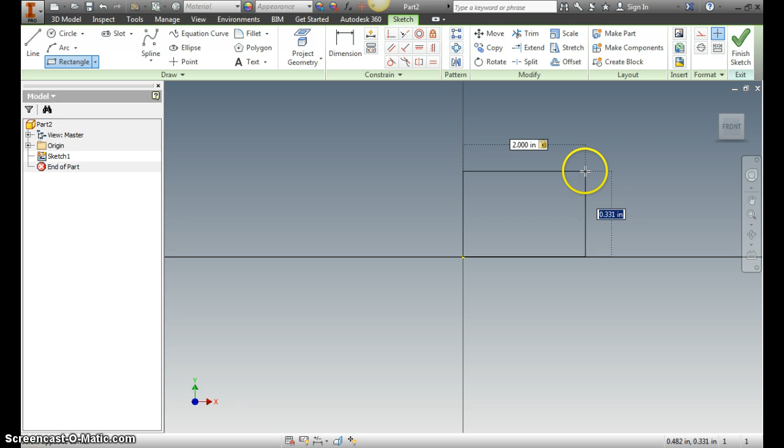So again, rectangle. That's going to be 2 by 5.5, and I think I'll also show you guys a few shortcuts or talk you through them. If I hit E on the keyboard, that's an extrude. 0.875 is the base.

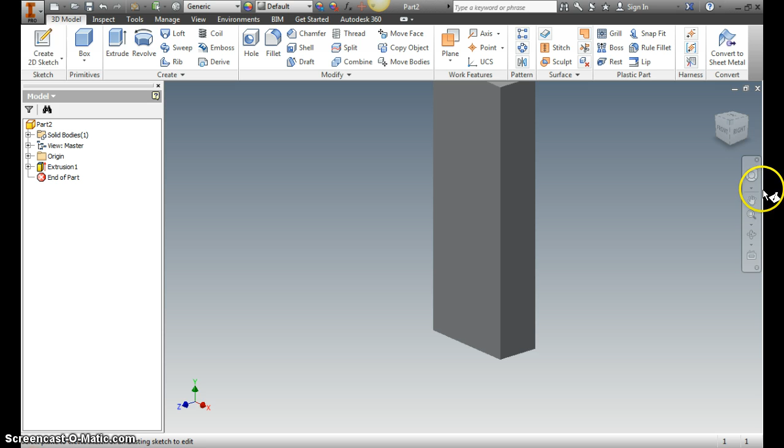Next up, I'm going to extrude the circle from the front towards the back. With that circle, what we know about it is the center is left and right, it's centered, but up and down it's 1.375 from the bottom of the train. Then we also know the radius is 0.75 inches. So in Autodesk, keep in mind, Autodesk uses diameters for circles.

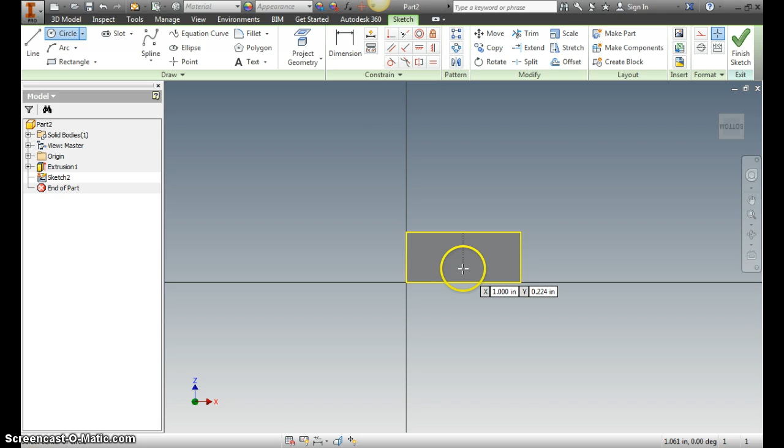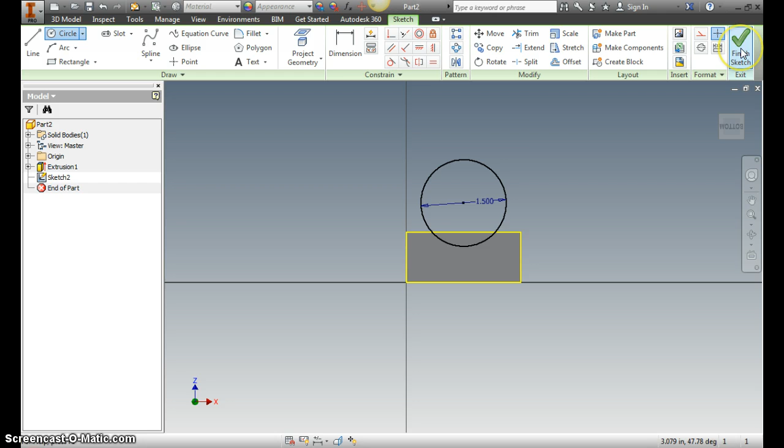So I'm going to start my circle, and what I can do is put that right where that dotted line starts showing me the center, and then I know 1.375 is my y-axis. That just gives me the center of my circle. From there I need to type in the 1.5 diameter. We'll finish the sketch and extrude our circle.

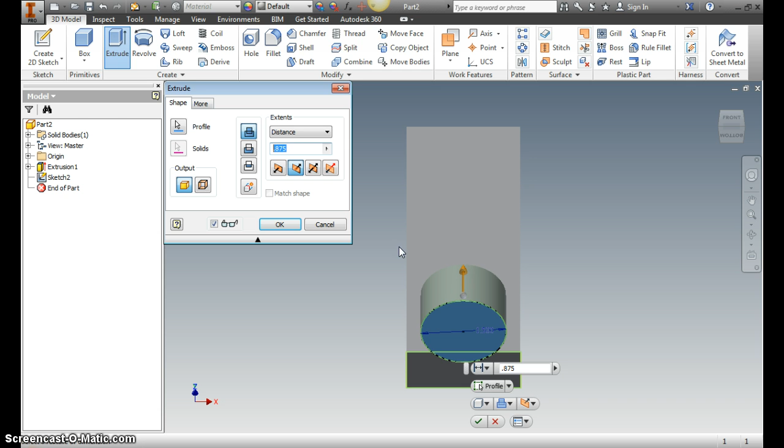Now we need to change direction, but we also need to keep in mind that when we change direction, it also switched it to remove material. So we need to go back to add material in that direction. And the distance, we don't know the distance, but we know that the whole train is 5.5 inches. So I'll type in 5.5, and then we want to subtract off the distance of the cab, which we know is 1.75. And there we've got the rest of the front of the train.

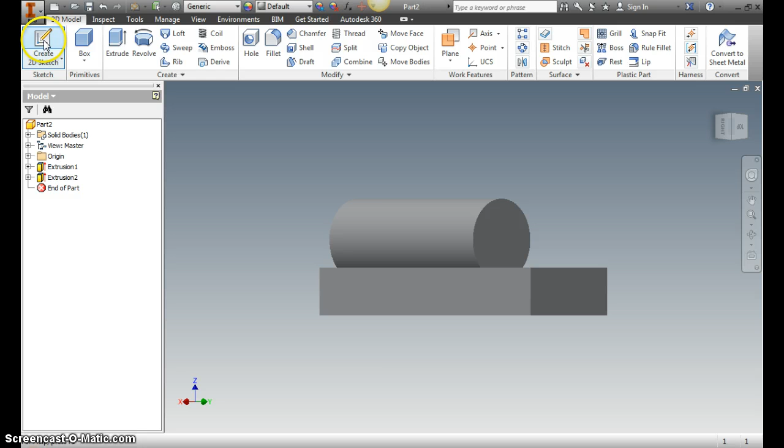Next we'll go to the back of the train and sketch on that back rectangle. We'll spin it around so that I can see what we're doing. Now, the cab of this thing is actually going to be better seen in this view here. If you look, you can see the left and right sides are vertical edges up from the base of the rectangle. The top of the cab, though, is part of an arc, basically.

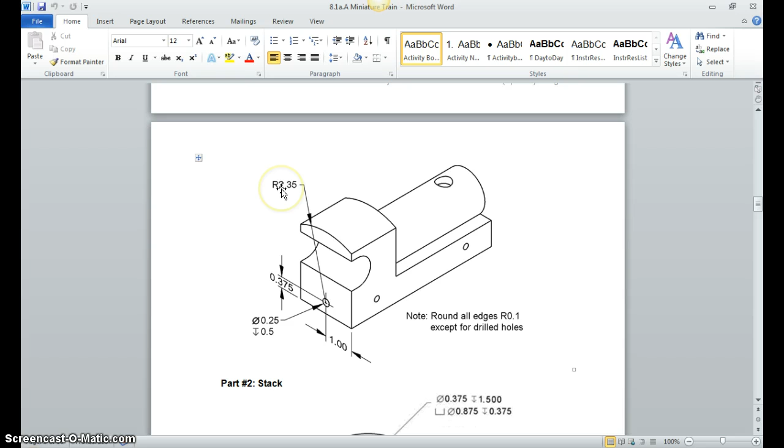So the arc itself is like a part of this circle, centered right here where my mouse is, and then the radius of that circle is 2.35 inches. So what we're going to do is create a circle centered right here on my mouse, and then make the diameter of that 4.7, and then from there we'll just trim off the part of the circle we don't need.

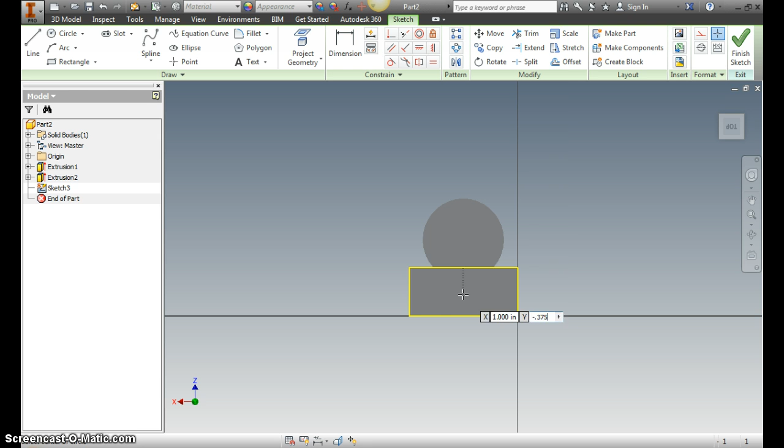So with our circle, again, I know it's centered left and right, but this time if I hit tab and go into edit my X and Y, you'll notice the Y is in negatives based on the orientation. So just be careful of that. All that changes is that when I type in my 0.375, I'm going to throw a negative 0.375. Okay. Again, that just gives me the center of my circle. From there, we know the diameter is 4.7,

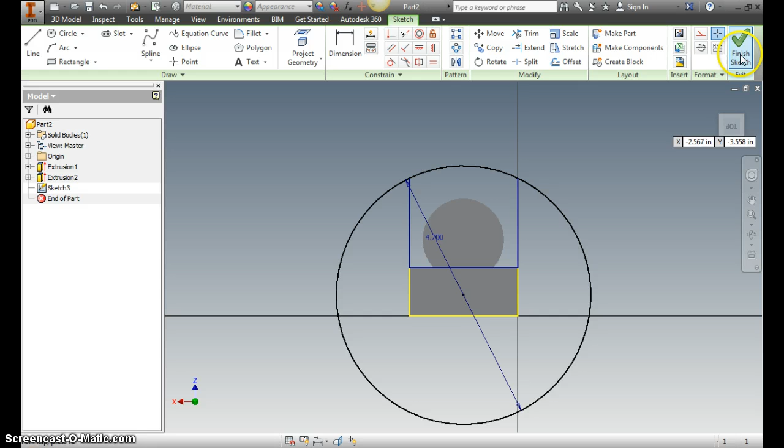and then we need to enclose that the rest of the way. So we'll snap to the left side corner with the vertical line, make sure it touches the circle. Go to the right side, make sure it goes to the circle, and last but not least, make sure that you enclose the bottom with a horizontal line. After that, I'm going to trim the circle that we don't need.

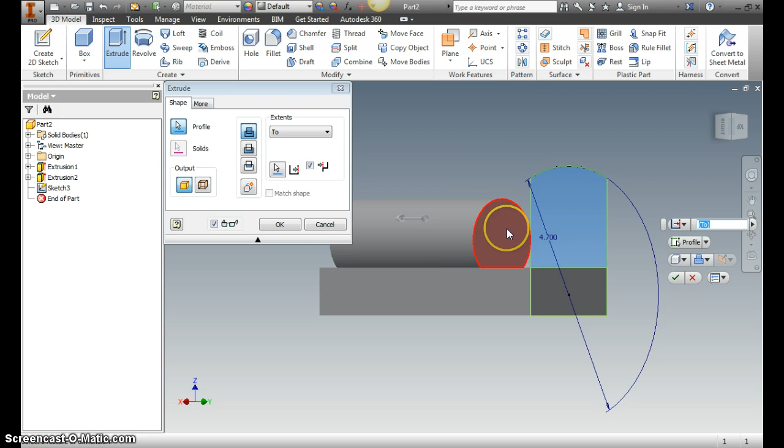I'm going to finish my sketch, E for extrude, and then here I'm going to change direction. I'm going to change that distance icon. I'm going to select To. To then allows you to pick the surface that it extends to. So I'm going to select the back of our cab, or the back of the circle, and there you have it.

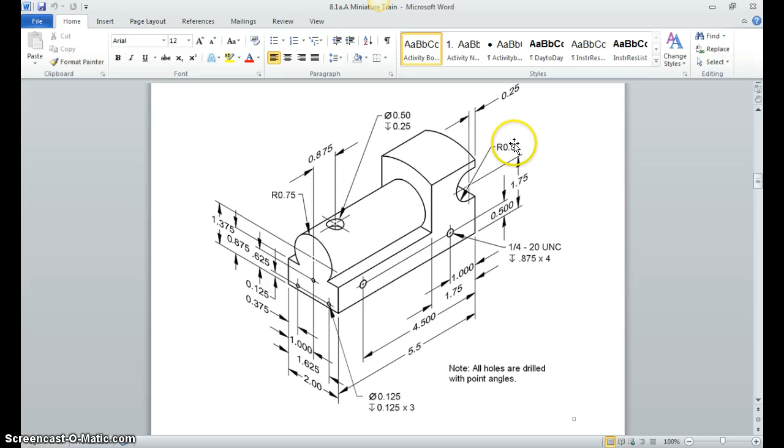And last thing I'm going to do on this video is show you that circle cut on the side of the cab. And what we know about that is, if we go back up, we have the center up 1 3/4 inches, and we're in from the back of the train 1/4 inch. From there it's a 1 inch diameter, a radius of 1/2 inch. So we'll go up 1 3/4, we'll go in 1/4, and then we'll draw our circle.

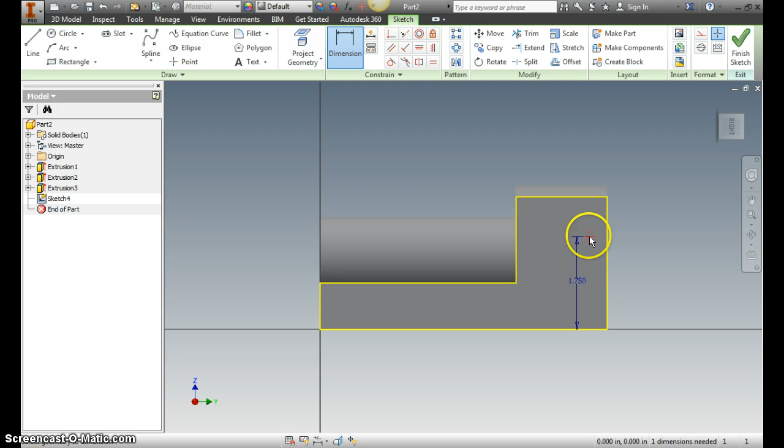What I'm going to do with this one, I'm just going to show you another way to locate circles. I know that that circle is somewhere in this region, so I'll click a work point and go up to dimension, and I'll just dimension where that work point goes. So I click the work point and the bottom surface, that was 1.75. Same thing horizontally, I'll click the work point and a vertical edge, and that is 1/4 inch.

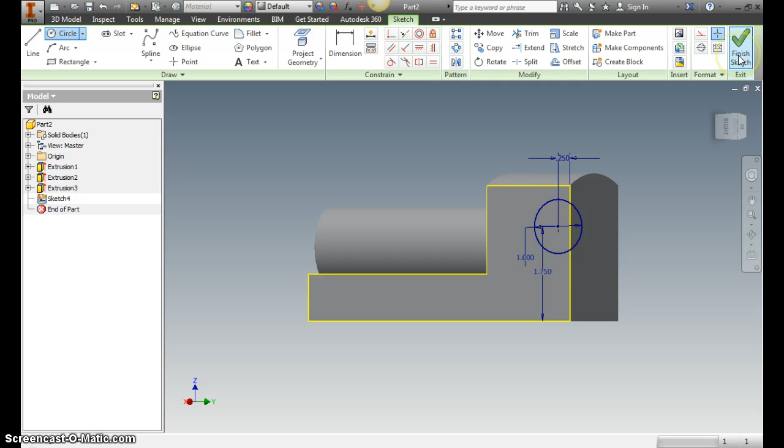Once we have it dimensioned, then I can go back to circle, select the center, select the work point, and that was a 1 inch diameter circle. Finish that sketch, extrude, make sure you select just the circle. I'll change the direction, therefore cutting the material, and then this time with the extent I will select through all, and that'll just make sure it goes all the way through the cab.

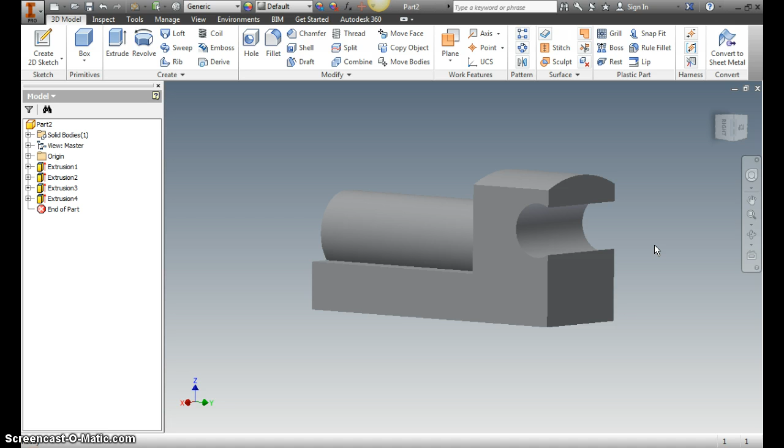So there you have it. We've got most of the train body. The next video I'll show you how to do the threaded holes for the wheels, the hole in the back, the hole for the smokestack, and the 3 holes in the front for the cow catcher.